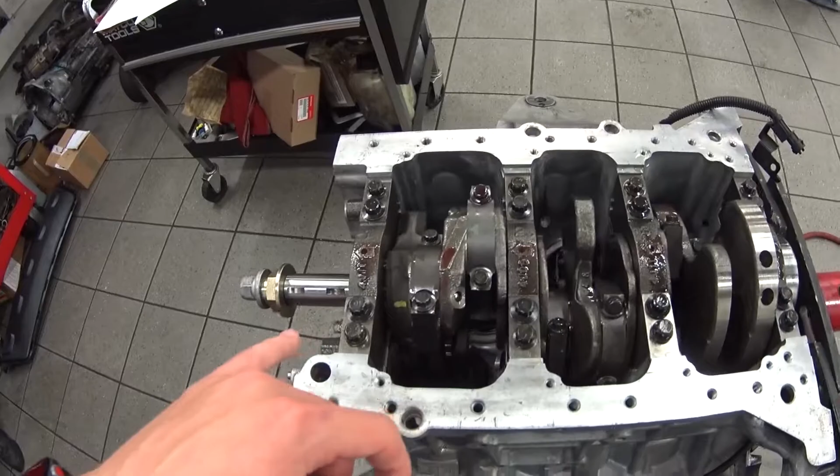So pretty much we're picking up exactly where we left off yesterday. We have the crankshaft put in, all the bolts are tightened up just slightly. We're gonna torque them all down to proper torques today, and then we'll see how far we're able to get. We got all the torque specs right here, so we're gonna start getting to work and get as much done as we can today, because we're kind of short on time, so we'll see how it goes.

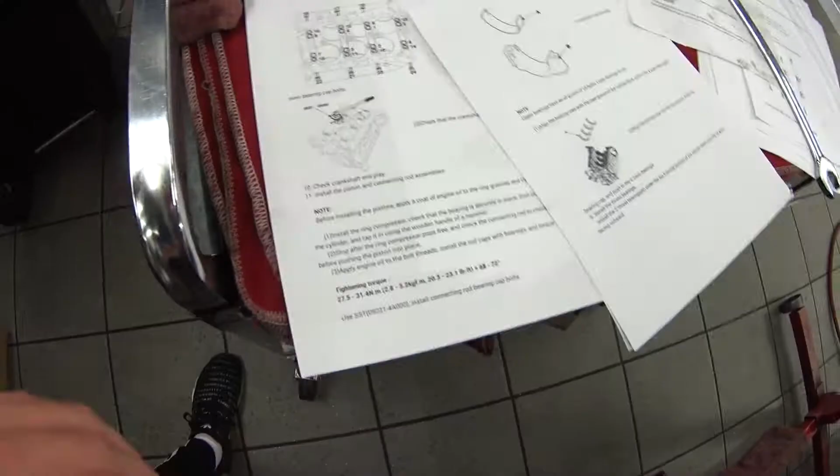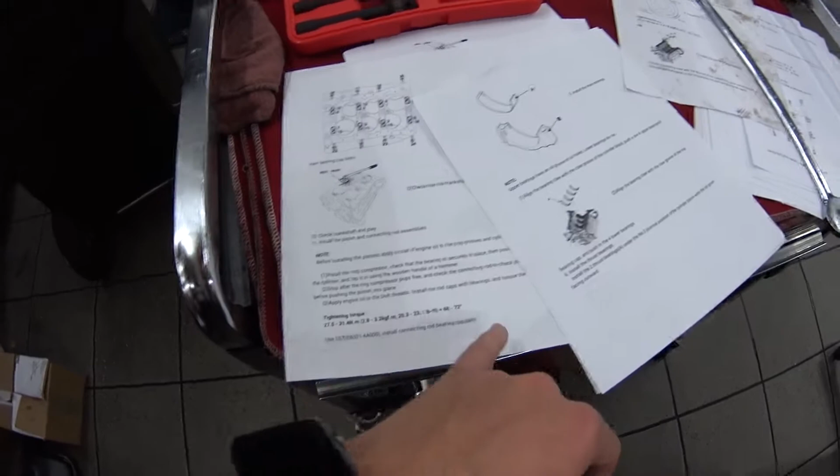Alright, so to start off, we're going to be tightening the connecting rod caps. It's between 27 and 31 newton meters, so we set the torque at 29.5, and we're going to tighten all of these one by one. And then after we go through every single one with the newton meters, we're also going to add the degrees. We have to go between 68 and 72 degrees extra. So we're going to start doing that now. I'm going to set you guys down.

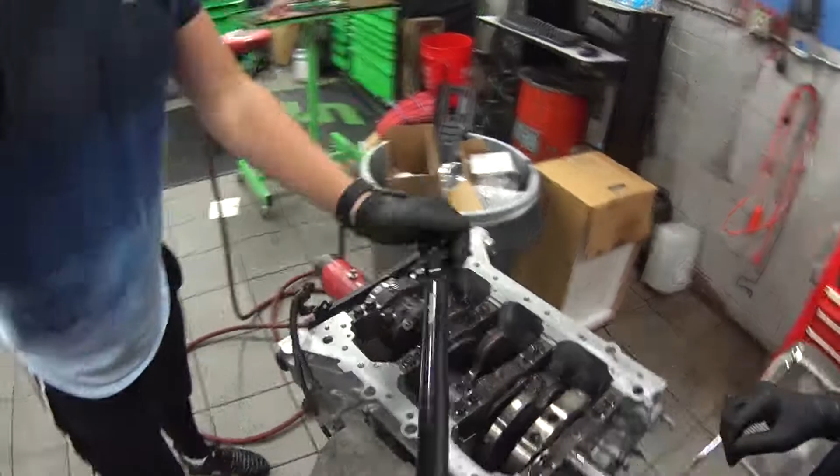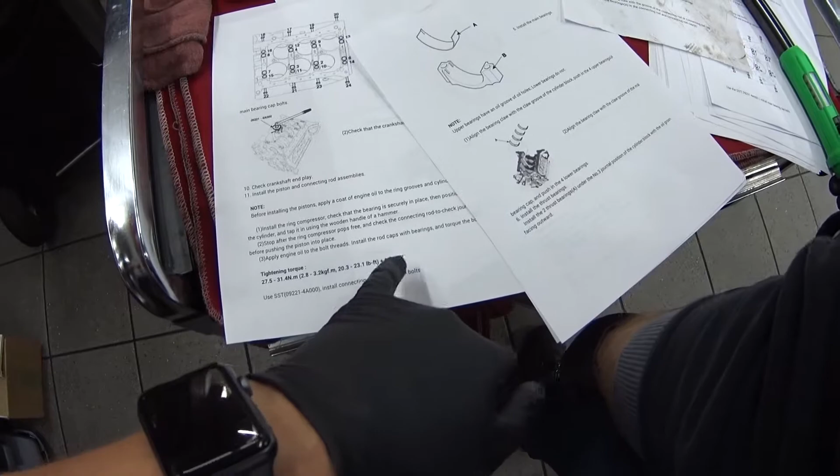So as you guys just saw, we torqued all of these down to 30 newton meters of torque, and as I said, right now we're going to be going off of the degrees. So now we have to add between 68 and 72 degrees to every single cap, every single bolt, and then after that we're going to start tightening the main caps.

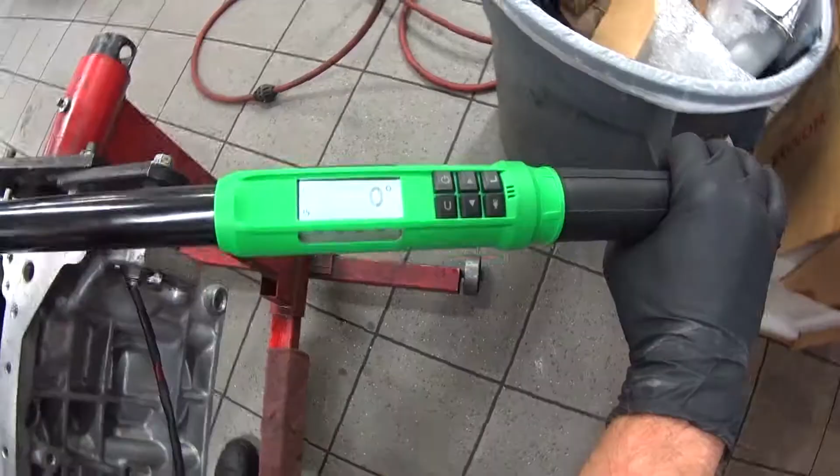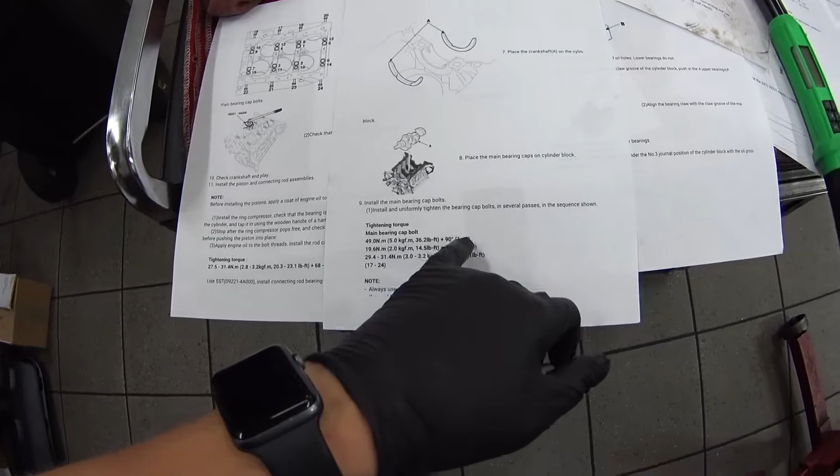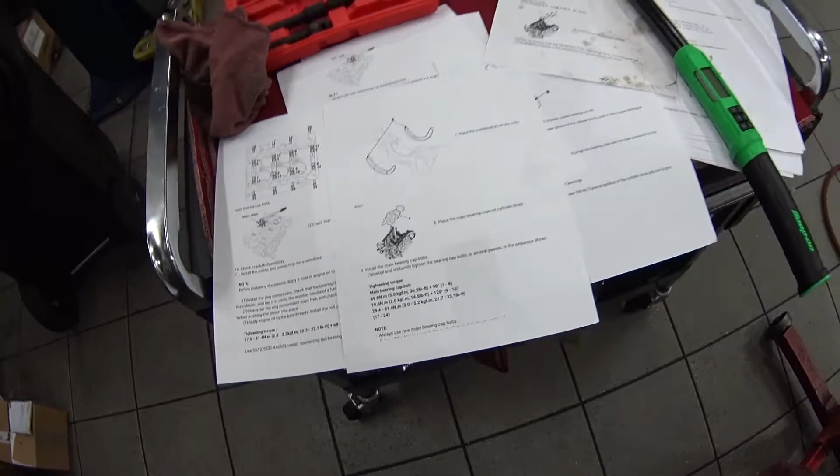After tightening all these connecting rod caps, we're going to start tightening the main bearing caps. The pattern is going to be bolts 1 through 8. That's the center bolts, these. We're going to be doing 49 newton meters of torque plus 90 degrees. First these 8 and then onto the rest. Okay, so we're going to set the torque wrench to 49 newton meters of torque, and we're going to start torquing down the middle main bearing bolts.

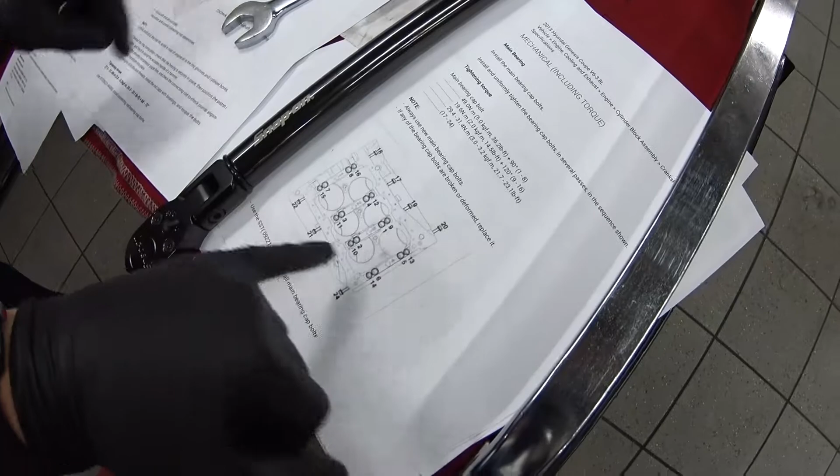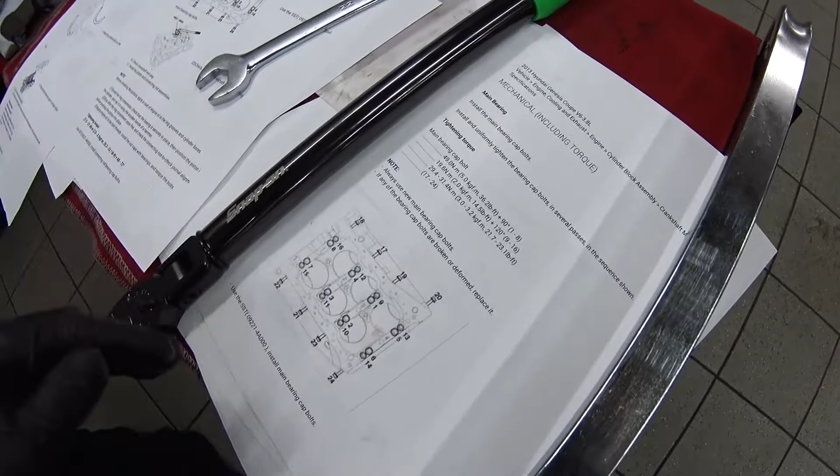So we tightened them down to 19.6 newton meters. We have the torque wrench set to 120 degrees. So these are all done. Now we have these side ones. There's also 8 of them. We're starting between 29.4 and 31.4 newton meters, and not adding any degrees, so probably going to tighten them to around 30 newton meters. And the order is 1, 2, 3, 4, 5, 6, 7, 8.

So now that all the bolts are tightened, my dad's just cranking it by hand and everything seems to be going smoothly. We torqued everything down, all the side bolts. So next up, we're going to take the top of the engine and start assembling from there. I think after assembling the motor and tightening everything, the coolest thing to watch is cranking the motor by hand and watching every cylinder pop up and down.

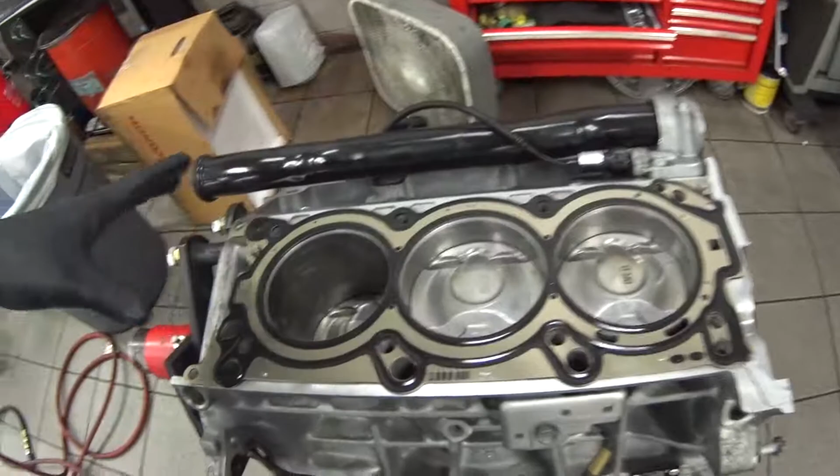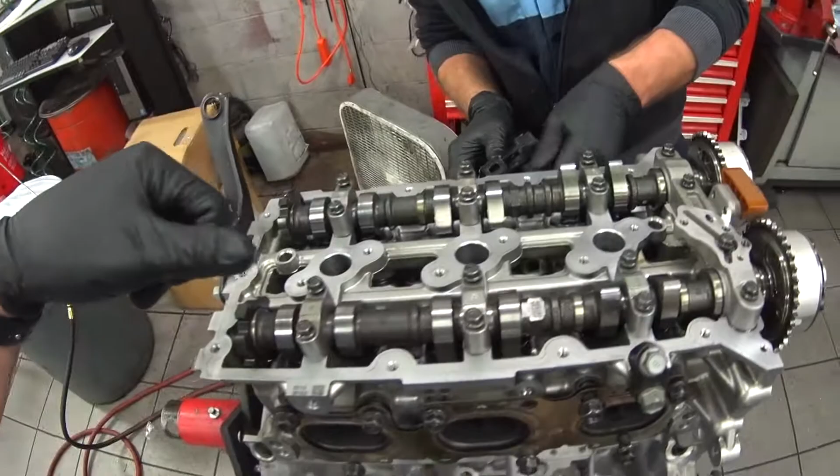Alrighty, so to give you an update, we added some gasket maker right there. We laid down the head gasket and now we're going to start installing the head. So now we got the head on, we're going to pull out the camshafts, put in the head bolts, tighten it down, and put the camshafts back on. Now that the camshafts are out, there's 8 total head bolts, and we're going to put them in and tighten them up.

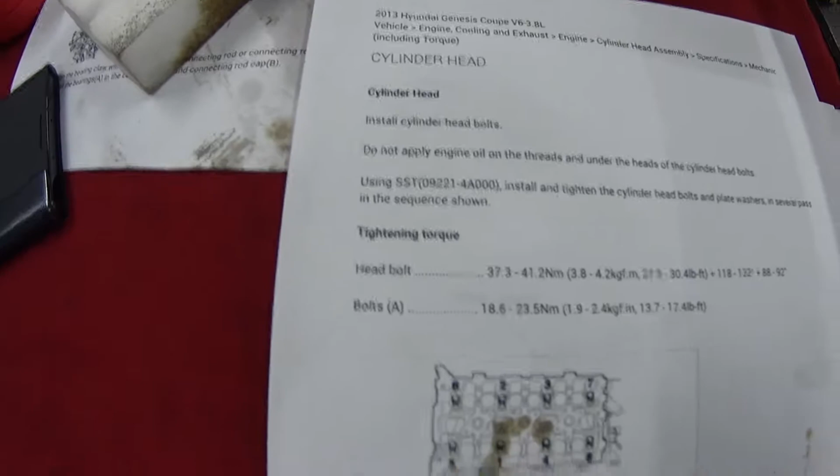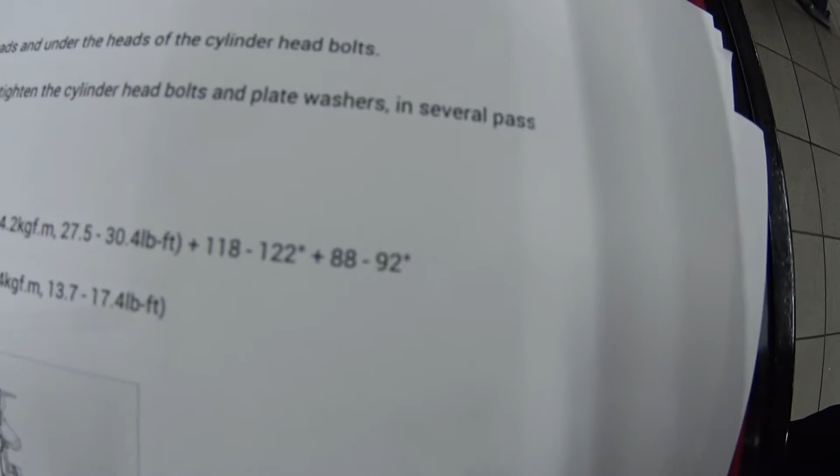So for the head bolts, the torque looks like it's going to have to be somewhere around 40 newton meters. And then we're adding about 120 degrees, and then we're adding another 90 degrees. So this is going to be the tough one to tighten, but it'll take some time.

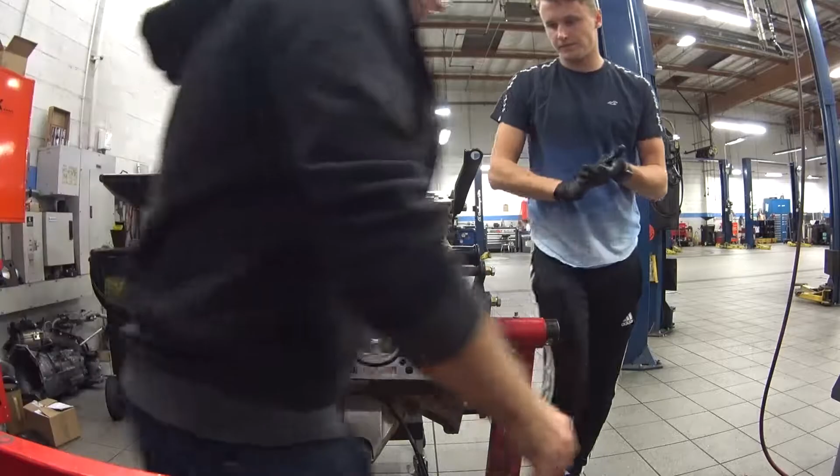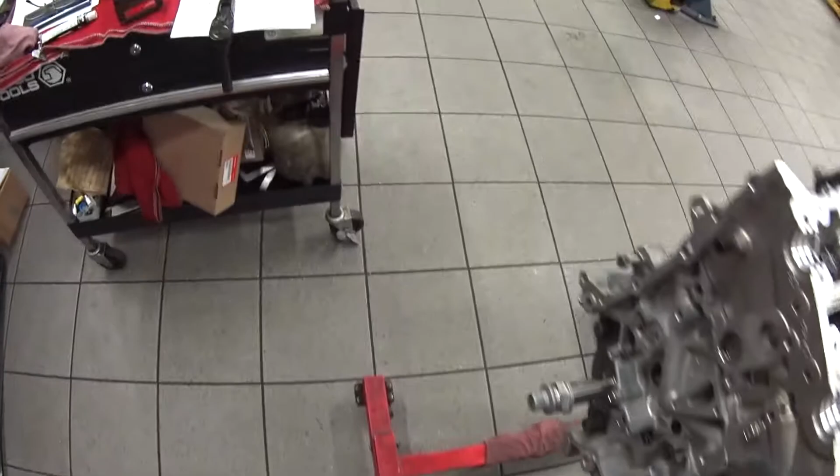So pretty much we tightened them. First we tightened each bolt in the pattern to 20 newton meters. Then starting from 1 going up to 8, we did 40 newton meters. And then we double checked and went through again from 1. These were actually a lot more loose because these pushed the head down. So we re-tightened them up to 40 and made sure that they're all at 40. So next up, we're going to be doing 120 degrees.

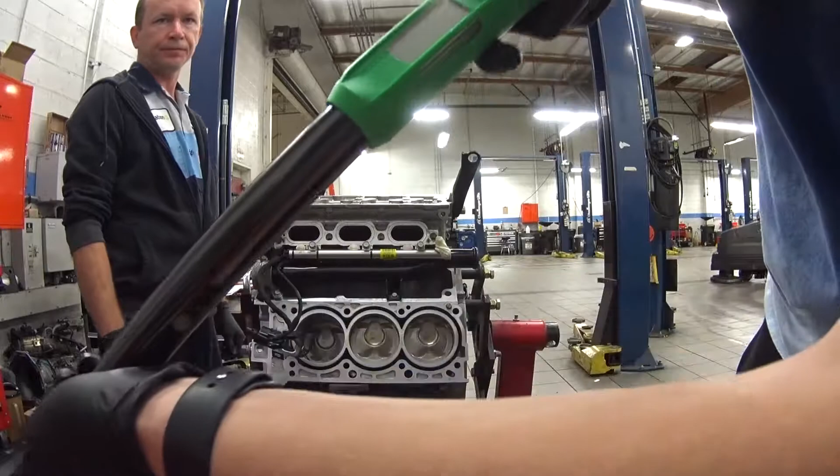Alright, so now we set the degrees to 120 and go through every single bolt once again. And now we set the degrees down to 90 and we go through every single bolt once again.

Now they're all torqued down. As you guys probably saw, it was pretty painful to do that. It took both of us and we're still barely holding the stand from turning. So now we're gonna put the camshafts back on and try to assemble the next head. Hopefully we have enough time.

And so pretty much got a lot done, a lot of progress. Both heads are on, so there's not much more left to do. I think tomorrow my dad's gonna be by himself because I am going to pick up another car. I'll probably make a video about it in the next video. You guys will see what it is. It's probably pretty obvious because that's what this channel kind of started on, the same car.

So hopefully, fingers crossed, my dad gets a lot done tomorrow. At least gets valve covers on and the oil pan on. That way Friday we get the timing chain cover on, the intake manifold on, pretty much most of the stuff put together. That way Saturday evening we can pull the car in, drop the subframe, put the motor on the subframe, and hopefully get the transmission connected as well. Just get everything buttoned up and ready to go.

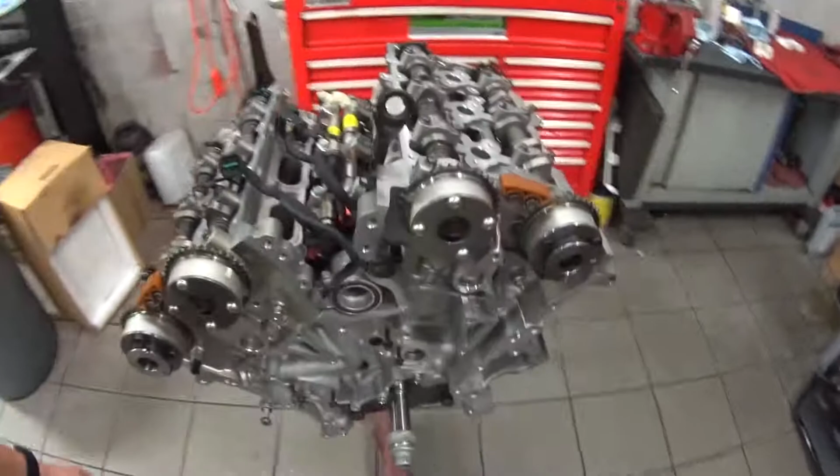So that way Monday all we have to do is put the subframe into the car, lift it up, connect all the sensors, connect everything, fill up the oil, fill up the coolant, and then it should start. So a lot of good stuff today, a lot of work done. Everything's going pretty quickly at this point. We're getting a lot of things done on time.